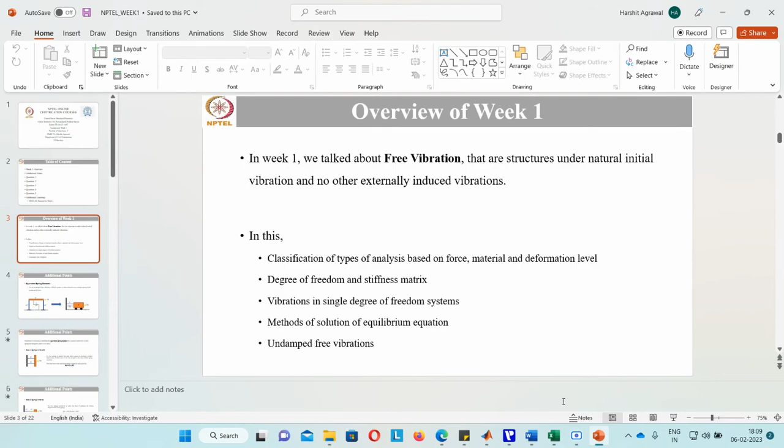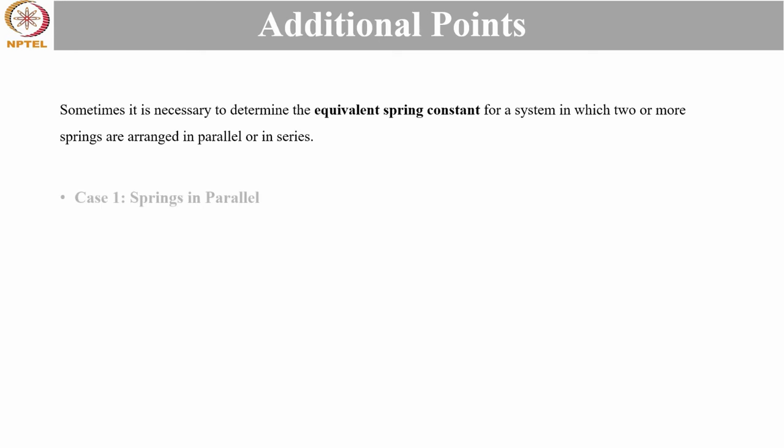Now, suppose these two columns have different material properties. Sometimes it becomes necessary to determine the equivalent spring constant where there are two or more springs arranged in parallel or series. And how can it happen? Suppose there are two columns which have different material properties or geometric properties, so they won't be able to offer the same stiffness, right? Thus, we need to know how to calculate equivalent stiffness, and such systems come under case 1, springs in parallel.

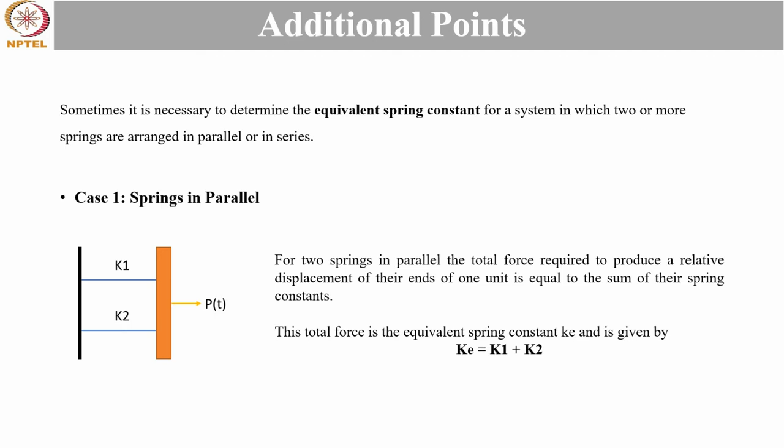So, if the two columns have different properties, the spring block system for the frame system will appear like this. And in this case, for the two springs in parallel, the total force required to produce the relative displacement at their ends of one unit is equal to the sum of spring constants. So here the total equivalent spring constant becomes Ke = K1 + K2.

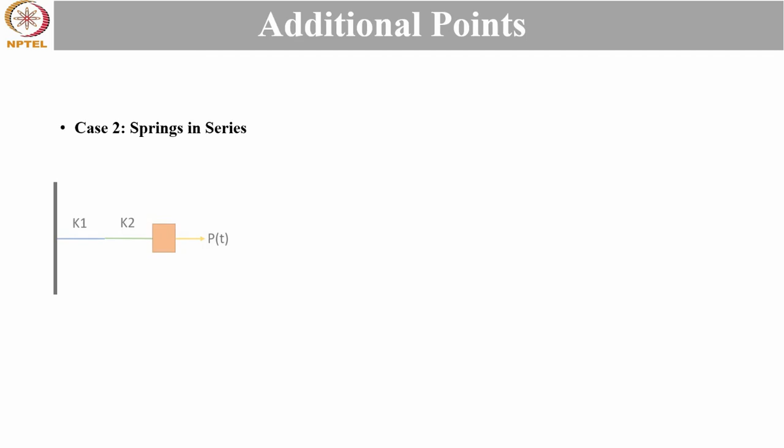Now suppose we have a multi-story building, a multi-story frame. So we may have more than one column on either side of the frame. So this is case 2, where springs are in series. And in this case, the spring block system may appear to be like this. For the springs assembled in series, the force produces a total relative displacement of delta U1 and delta U2. And the equivalent spring constant is given by 1/Ke = 1/K1 + 1/K2. So this was one additional point that I wanted to cover for week one.

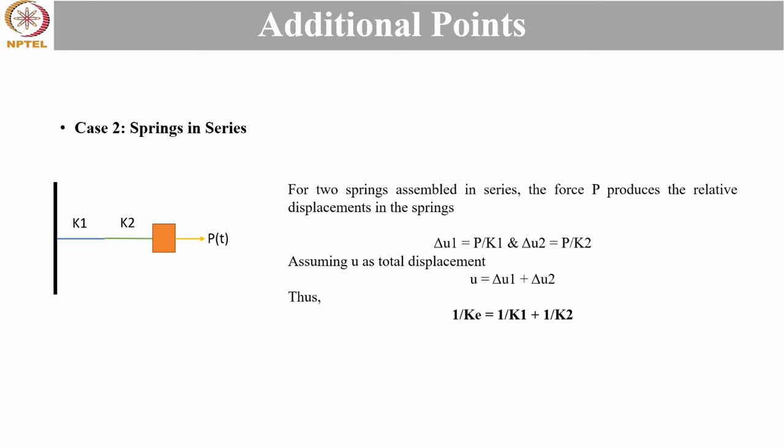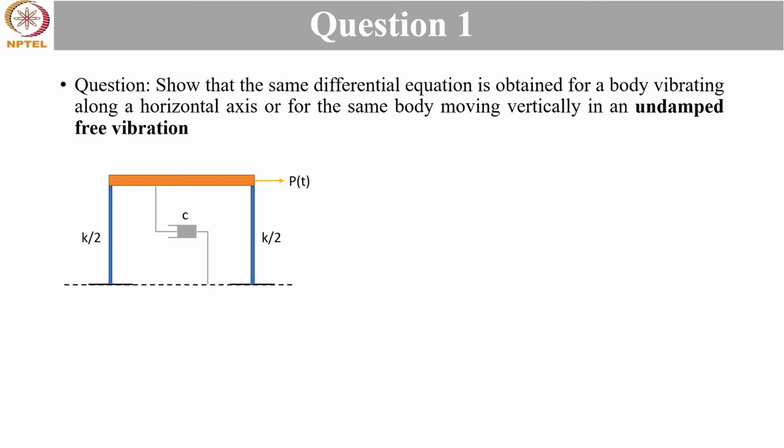So, first question. Show that the same differential equation is obtained for a body vibrating along a horizontal axis or for the same body moving vertically in an undamped free vibration. During the course content we saw that a frame structure can be represented as an equivalent horizontal spring block system. An undamped free vibration means that there is no external force, so P(t) = 0, and since it is undamped, C = 0. The dynamic equilibrium equation is m u double dot + K u = 0.

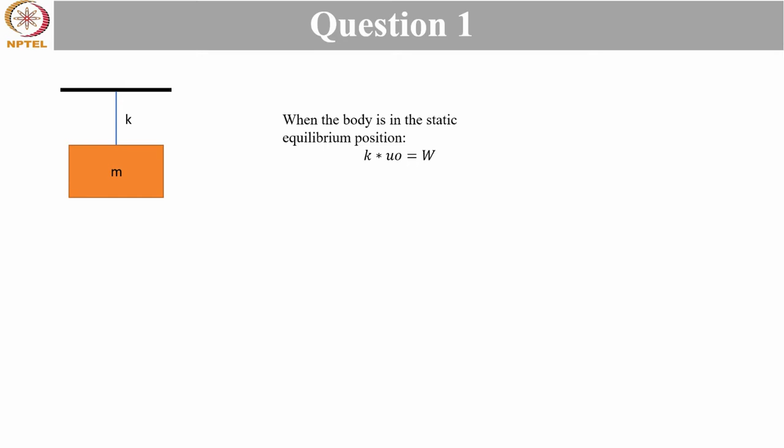Now, will this equation hold true if my body is vibrating in the vertical direction also? Here the spring block system represents a horizontal vibration of the frame. But will it hold true if the spring block system is vertical? That we will see. When the body is in static equilibrium, there will initially be a little displacement in the spring, balanced by the weight of the mass. So K u naught is equal to the weight of the block. Now suppose the body is displaced by a distance U from its position of equilibrium.

So what will happen? First, there will be a spring force acting upward, with value K times (u naught, the initial displacement at the equilibrium position, plus U, the displacement we have provided to the system). Second will be the weight of the block, acting downward. And third is the inertia force, m u double dot, acting upward. Why is the inertia force acting upward? It is due to D'Alembert's principle, that a moving mass always generates an inertia force opposite to the motion.

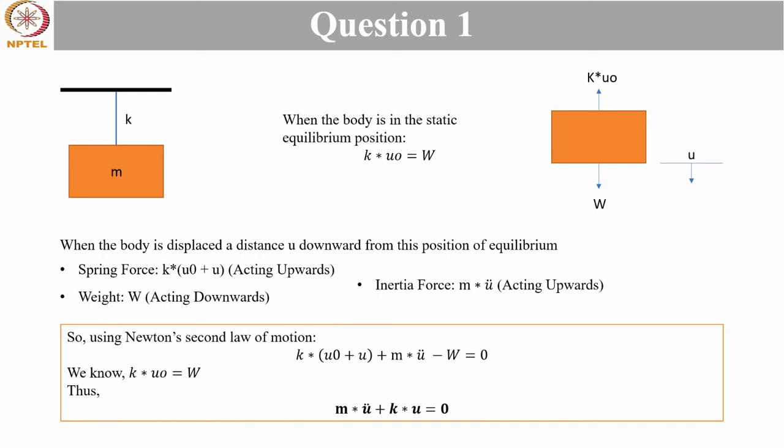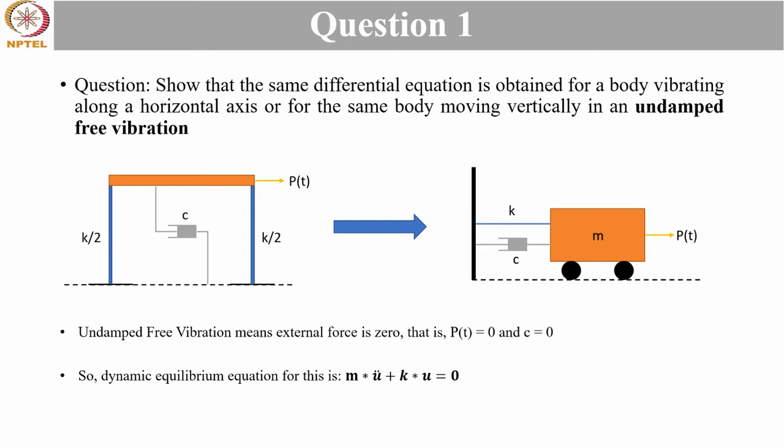So, using Newton's second law of motion, K(u naught + u) + m u double dot - W = 0. And from the initial static equilibrium relation, we know K u naught = W. Substituting this in the above equation, we get m u double dot + K u = 0. So this proves that the same differential equation is obtained whether we convert our frame structure into a horizontally vibrating system or a vertically vibrating system. This was just a proof question that I found needed to be included. Next we will see the numerical questions.

I hope everything is clear till now. Okay, so let's proceed ahead. Thank you, Mayur. Let's proceed ahead.

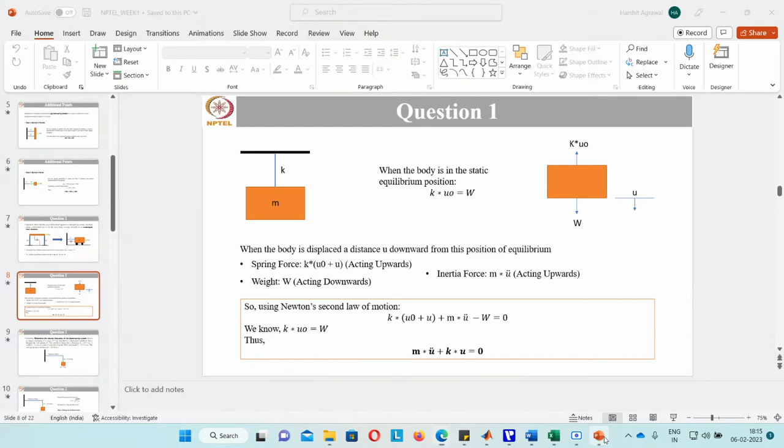So, second question. In this question, it is given: determine the natural frequency of a beam spring system shown in the figure, consisting of a mass of 5 kg attached to a horizontal cantilever beam through the coil spring K2. The cantilever beam has a thickness h equal to 0.5 mm, a width b equal to 1 mm, and is made of concrete of grade M20 and length L equal to 12.5 mm. The coil spring has the stiffness K2 equal to 20.

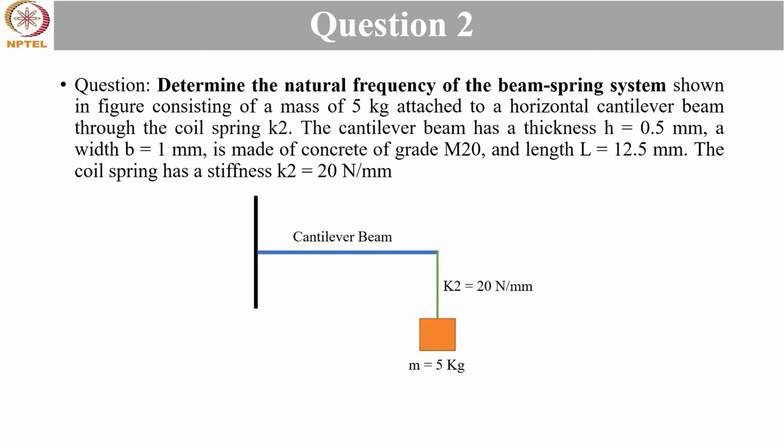So in the figure you can see we have a fixed support and a cantilever beam. The properties of the cantilever beam are given in the question: thickness 0.5 mm, width 1 mm, grade of concrete 20, and the length of the beam is 12.5 mm. There is a coil spring of stiffness coefficient 20, and at the end of the coil spring there is a mass block of 5 kg attached. So we need to determine the natural frequency of this spring block system.

Okay, so natural frequency of a system is denoted by omega n, and it is equal to under root of k equivalent upon mass. Now we know mass is equal to 5 kg, but what is k equivalent? K equivalent is not just k2, it is the equivalent of both cantilever beam and the spring. So we need to calculate the k equivalent in this case. And the theory for this we covered just a while ago, where we talked about springs in series and springs in parallel.

So step one is finding the K for the cantilever beam, because for the cantilever beam we have been given the data of its dimensions and its grade of concrete, and not the stiffness coefficient. So we will first find the stiffness coefficient for the cantilever beam. For a cantilever beam acted upon by a static load at the end, the stiffness coefficient is given by 3EI by L cube. Now we know L, but we don't know E and I. So first we need to estimate E, the elastic coefficient, and I, the moment of inertia.

When the grade of concrete is given, according to IS 456 the modulus of elasticity is 5000 under root FCK, and FCK is given as 20. So the modulus of elasticity will come out to be 22361 Newton per mm square. Second is the moment of inertia, BD cube by 12. The width is 1 mm and the depth is 0.5 mm. So 1 into 0.5 cube upon 12 will come out to be 0.01042 millimeter to the power 4.

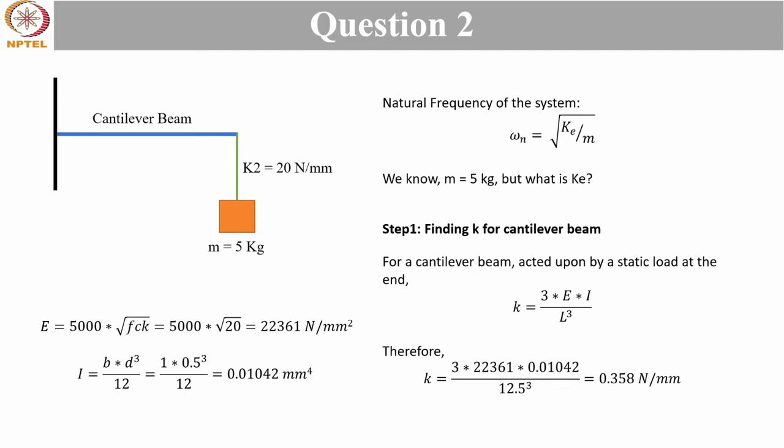So now we know the modulus of elasticity and the moment of inertia. So we can calculate K as 3EI by L cube. It will be 3 into 22361 into 0.01042 upon 12.5 cube, which will come out to be 0.358 Newton per mm. So this is the stiffness coefficient for the cantilever beam.

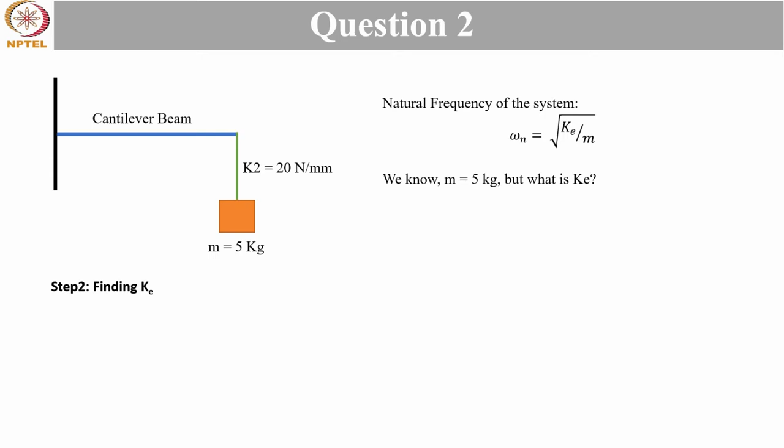Now we know the formula of natural frequency of the system. Second step is to find the K equivalent. We know the stiffness coefficient of the cantilever beam and of the spring. Since these two springs are in series, the K equivalent will be 1 upon K equals 1 upon K1 plus 1 upon K2. This formula we saw just some time back. Substituting both values, we will get the equivalent coefficient as 0.3517 Newton per mm, or 351.7 Newton per meter.

So we know the K equivalent now and we know the mass. The final step, step 3, is to find the natural frequency: omega n is equal to under root of K equivalent upon mass. K equivalent is 351.7 Newton per meter upon mass of 5 kg. Make sure that the units are proper. When we have a mass in kg, our K equivalent should be in Newton per meter. Doing the calculation, you will get the natural frequency of the system as 8.387 radian per second, which was intended from this question.

And this system included two springs in series. So we covered a new type of question where two springs of different properties were in series and in an undamped free vibration state. I hope you are clear with this question. Any doubts up till now?

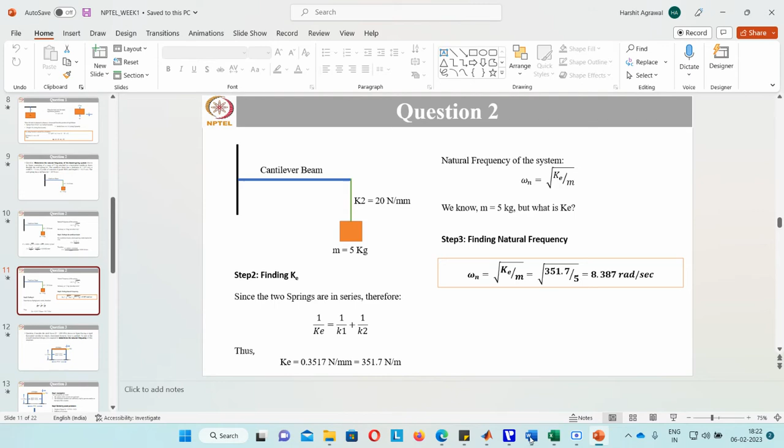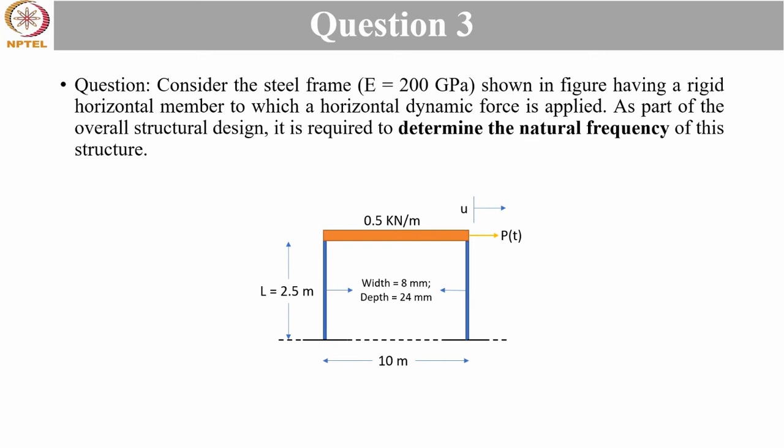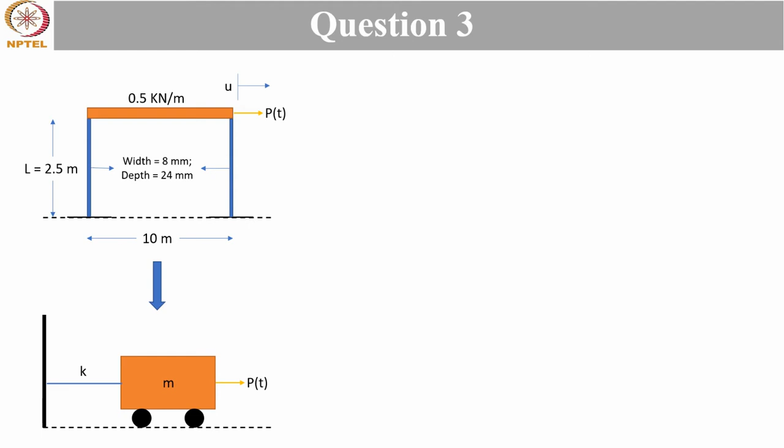Okay, so let's see how to solve this problem. We need to determine the natural frequency of this structure. So this is the structure. Now this structure can be converted into an equivalent spring block system as shown in the figure below, where K is the spring, M is the mass, and P(t) is the external force acting on the system.

Every time step one always remains the same, that is the assumptions that we need to make for converting this steel frame into a spring block system are as follows. First, the mass of the columns are neglected, and second, the horizontal members are sufficiently rigid to avoid any rotation at the top of the two columns. Whenever these two assumptions hold true, then only you can convert the steel frame into an equivalent spring block system. Else, there will be much more complications and you can't convert the system directly.

So, always start with these assumptions. See if these assumptions are given in the question, or assume them by yourself before proceeding ahead, if they say make necessary assumptions by yourself. Okay. So step two is first we need to estimate the system parameters. Now, what is the weight of the frame?

It is given 0.5 kilonewton per meter, but our frame is not of 1 meter, it is of 10 meter. So the total weight of the frame would be weight of the frame per unit length into total length. So it is 0.5 into 10, which is 5 kilonewton. So this is the weight of the frame, not the mass. Second is the stiffness of the columns. Now we have been given with the dimensions L, length, width, and depth.

So we first need to estimate the stiffness of the column. For stiffness we need moment of inertia and modulus of elasticity. Modulus of elasticity is given in the question, we saw 200 GPa, and moment of inertia we will estimate now. The formula for moment of inertia is bd cube by 12. So b is width, which is 8 mm, d is depth, which is 24 mm. So moment of inertia becomes 8 into 24 cube by 12, which is 9216 millimeter to the power 4,

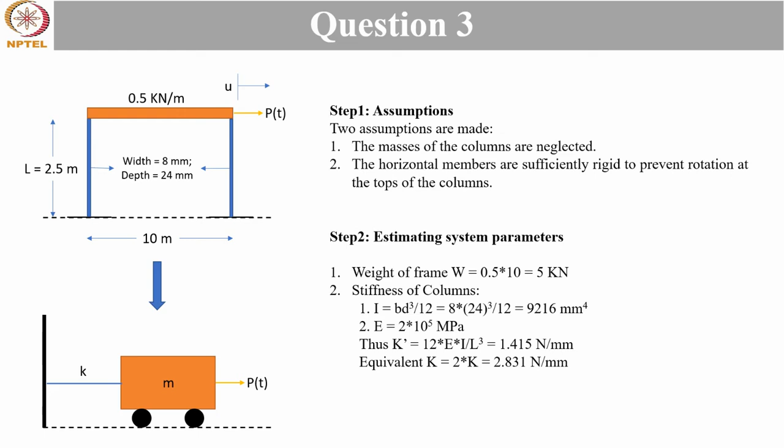So the natural frequency of the system can be calculated as omega is equal to under root of k by m. K we found as 2.831 Newton per mm, that we need to convert in Newton per meter first. So it will be 2831 Newton per meter. And mass is 5 kilonewton, we need to convert into kg, so it will become 500 kg.

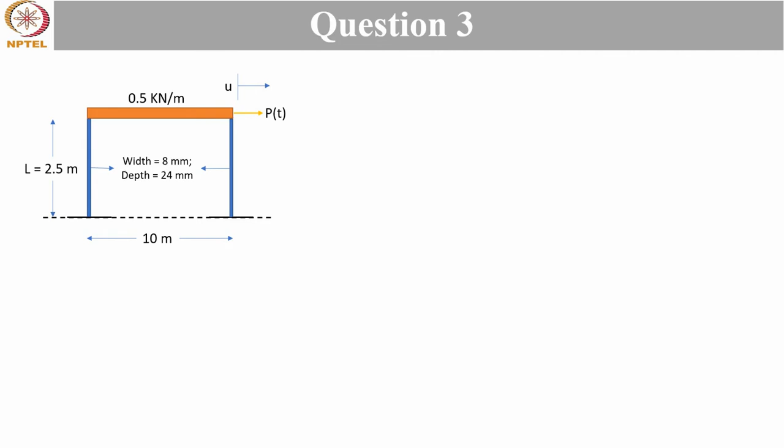So remember that always see the units first before reporting any answer, because unit conversion is a very important step when you are doing the calculations. So it will become under root of 2831 divided by 500, and upon doing the calculation you will get the value 2.38 radian per second. So this is the natural frequency of the system that was given in the question, 2.38 radian per second. So this solves our third question.

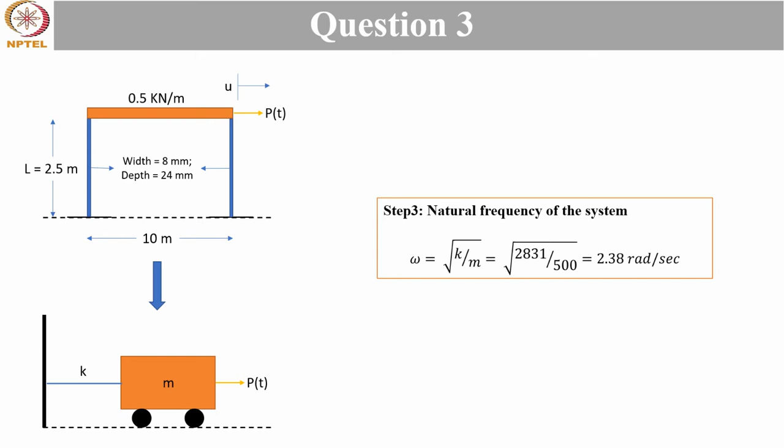Till now we have seen three questions. All three of them had some variation. First was a derivation, second we saw a question where two springs were in series, and third we saw a question in which two springs were in parallel. Now the fourth question. I hope things are clear till now.

Okay, so let's proceed ahead. So now we will see the fourth question, which is a practically linked question, which you can even visualize.

Okay, so the question says the elevated water tower tank with a capacity of 5,000 gallons of water, shown in figure, has a natural period in lateral vibration of 1 second when the tank is empty. When the tank is full of water, its period lengthens to 2.2 second. Determine the lateral stiffness K of the tower and the weight W of the tank. Tank means empty tank we are talking about. Neglect the mass of the supporting column.

So this was the assumption which we saw earlier also, which helps us to convert it into a spring block system. Assume 1 gallon of water weighs approximately 5 kg. So I will give you 1 minute to reread the question and think what has been given in the question and how we will proceed ahead.

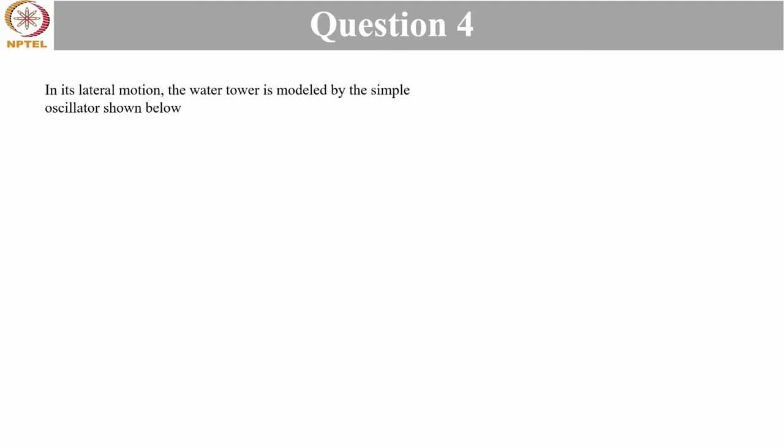So in its lateral motion, the water tower is modeled by the simple oscillator shown below. Why we can model this? Because it is given that the weight of supporting column can be neglected, and since it fulfills the assumptions of converting into a spring block system, we can convert it into a spring block system.

Now, we have been given two periods of vibration, one when the tank is empty and one when the tank is full. So, we first need to determine the natural frequency of vibration of tank. So, the natural frequency of tank when it is empty can be given as: when the tank is empty, the natural period is 1 second.

Now, we know omega is equal to 2 pi by T. Omega is equal to 2 pi times frequency, and frequency is 1 upon period. So omega is 2 pi upon time period. And we also know omega is equal to under root of k by m. So equating both the equations, we can say 2 pi by T is equal to under root of k by m.

Now, when the tank is empty, the period of vibration is 1 second, and when the tank is empty, the weight of the tank we can write as mt. So 2 pi by 1 is equal to under root of k by mt. This is our first equation, which we got from the data given in the question, the natural period when the tank is empty.

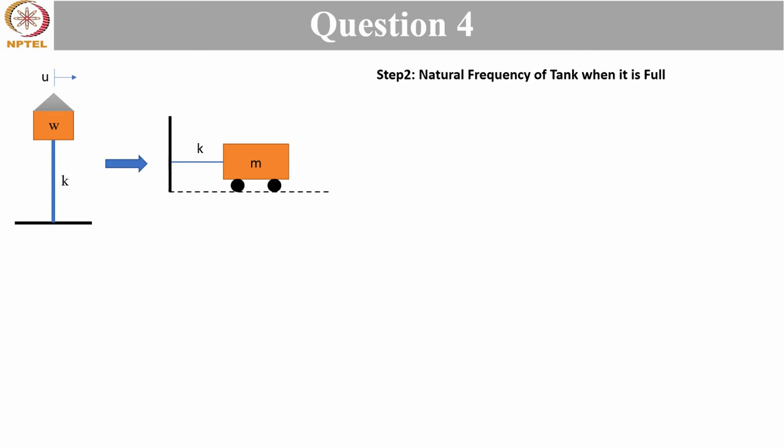Now, second, the natural period of the tank when it is full. Full means when it is filled with water. So when the tank is full, the natural period increases to 2.2 seconds. So again, omega is equal to 2 pi by T, and omega is equal to under root of k by m. So equating both equations, we get 2 pi by T is equal to under root of k by m. T is 2.2 seconds, and m this time would be mt plus mw. Mw is the weight of water. So 2 pi by 2.2 is equal to under root of k upon mt plus mw.

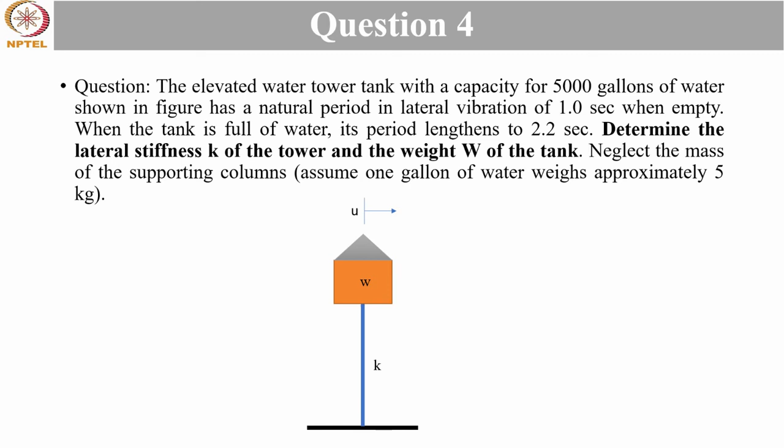Now mt we don't know, k we don't know, mw we know. It was given in the question that the water capacity of the tank is 5,000 gallons of water, and we are assuming that the tank is completely filled with water when they talk about the tank being full. And it has been said to assume that 1 gallon of water weighs 5 kg. So 5,000 gallons of water will weigh 5,000 into 5, that is 25,000 kg.

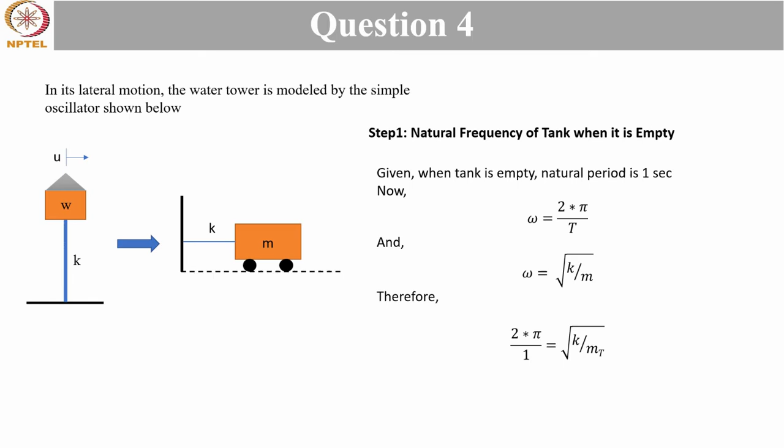Now we have two equations. One is 2 pi by 2.2 equals under root of k by mt plus mw, and the one we saw in the first step, which was 2 pi by 1 is equal to under root of k by mt. So we will square both equations and divide the LHS and the RHS respectively. We'll get (2 pi by 1) squared upon (2 pi by 2.2) squared. So it will be 2.2 squared upon 1 squared. That will appear on the LHS side.

And on the RHS side, under root of k by mt squared will be k by mt, and under root of k by mt plus mw squared will be k upon mt plus mw. So k and k will cancel out, and we will get mt plus mw upon mt, and mw we know is 25,000. So the final equation will be 2.2 squared upon 1 squared is equal to mt plus 25,000 upon mt.

Now solving this equation, (2.2 squared minus 1 squared) mt is equal to 25,000, and thus the mass of the tank will come out to be 6510.4 kg. The calculations you can also do side by side. I have solved this question initially, so I know the values directly. So the mass of the tank is 6510.4 kg.

This was the first thing that we needed to estimate, but in the question we were asked the weight of the tank. Mass of the tank is different, weight of the tank is different. So you just need to read the question very carefully before reporting the final answer. So weight is mass into acceleration due to gravity, so mt times g. G is 9.8 meter per second squared.

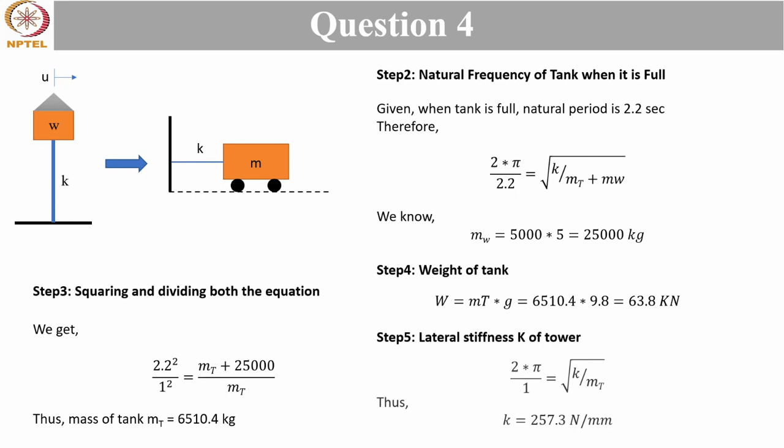And now we need to also calculate the lateral stiffness K of the tower. So we know the mass of the tank, and we know the mass of water. So we can use either equation, the natural frequency of the tank when it is empty or when it is full. Suppose we are using the first equation when the tank is empty, so we have 2 pi by 1 is equal to under root of K by mt.

We know the value of mt, so just substitute the value of mt and do the calculation. Squaring both sides, we will get K is equal to 257.3 Newton per mm. So this way we estimated both the weight of the tank and the lateral stiffness K of the tower.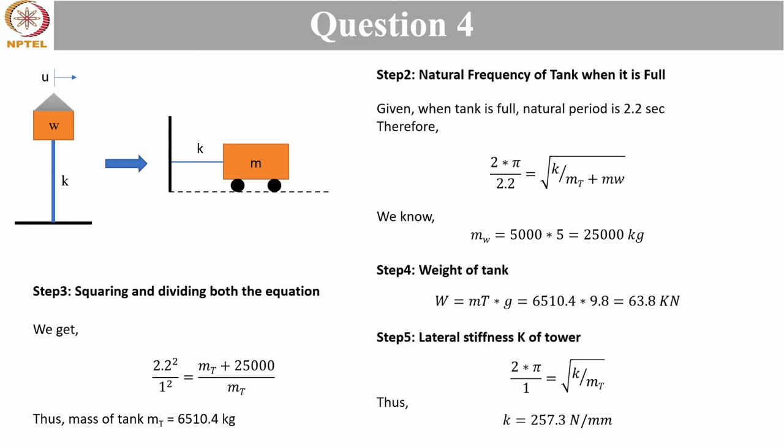I hope this question is clear to everyone. Any doubts in this question?

Arshad, do you have any doubts?

Okay, so let's proceed ahead to the fifth question. What this question says: the steel frame shown in figure is fixed at the base and has a rigid top W of weight 100 kilonewton. Experimentally, it has been found that its natural period in lateral vibration is equal to 1/10 of a second. It is required to shorten or lengthen its period by 20%, either by adding weight or strengthening the column.

We need to determine the needed additional weight or additional stiffness for each case, for shortening or for lengthening. Neglect the weight of the column. You can see the diagram. There is a simple steel frame structure, two columns supporting a steel frame. The weight of the steel frame is given, and the natural period of vibration of the steel frame is also given.

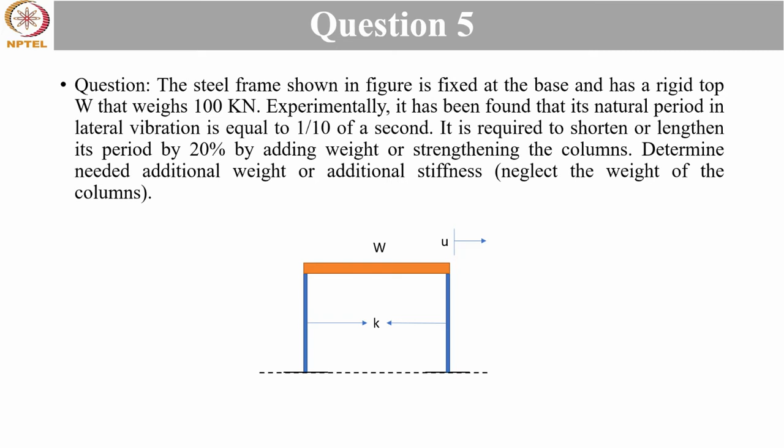So let's see the solution now. I hope you are clear with the question. So this is our frame column system. First, we need to determine the stiffness of the column. In the question, the weight of the steel frame has been given. Initially the natural period of vibration is also given, but before proceeding ahead with how we can shorten or lengthen the period, we need to first determine the stiffness of the column.

So we know the period of vibration and weight of the steel frame. So omega is equal to 2 pi by T, and omega is also equal to under root of k by m. So 2 pi by T is equal to under root of k by m. T is 1/10 of a second, which means 0.1 second. The weight is given as 100 kilonewton, but m is mass, so we need mass. mg is equal to W, so m is equal to W by g. So 100 divided by 9.8, that will be our mass.

So 2 pi by 0.1 is equal to under root of k into 9.8 upon 100. Solving this equation, we will get k is equal to 40.243 Newton per mm. So this is the stiffness of the columns, both the columns combined. Okay.

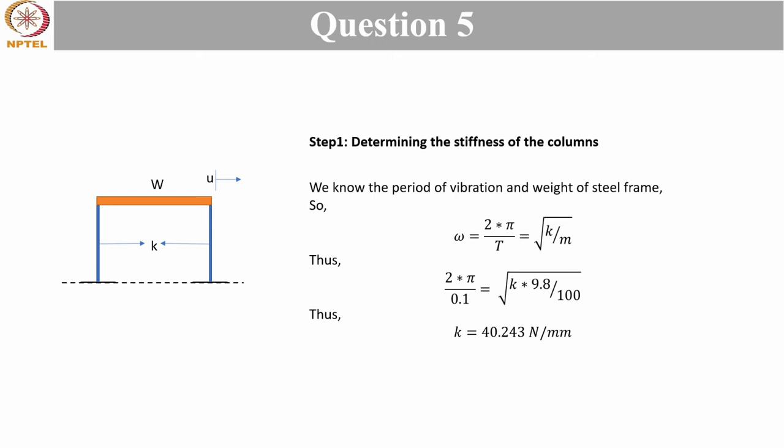Now, the first part of what we need to solve: we need to shorten the period of vibration by 20%. There are two options for us. Either we can focus on the frame or on the columns. For shortening the period, either we can reduce the weight of the frame or we can strengthen the column, but we can't reduce the weight of the frame. So the only possible option is to strengthen the column, which means we need to increase the stiffness of the column.

So the new period, a 20% decrease, means 0.8 times the original period. So 0.8 times 0.1, which is 0.08 second. Therefore, again, omega is equal to 2 pi by T, and omega is equal to under root of k by m. Suppose we need to increase the stiffness of the column by delta k. So 2 pi upon 0.08 is equal to under root of k plus delta k times 9.8 divided by 100. Why 9.8 divided by 100? To convert weight into mass.

And 40.243 Newton per mm was our actual stiffness of the column, which we converted into Newton per meter, and delta k is the additional stiffness that we need to provide to strengthen the column, which will help us shorten the period by 20%. Solving this equation, we get delta k is equal to 22.637 Newton per mm. By this amount, we need to strengthen the column. So this is the first part of our solution.

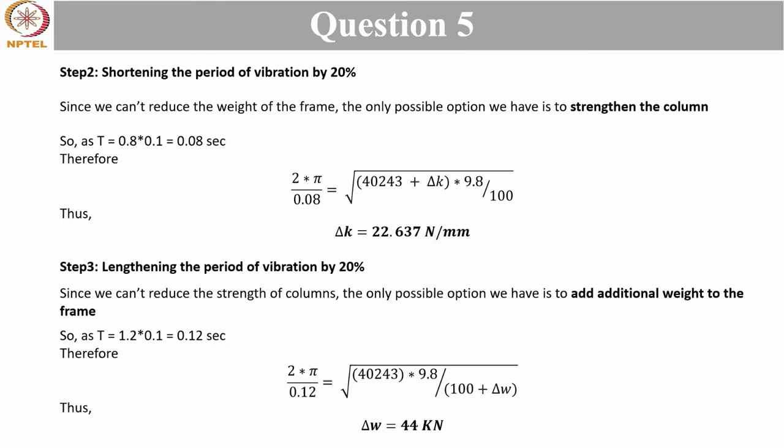So in this way, we have covered different kinds of practically related additional questions that will help you to solve the NPTEL assignment and will provide you much better insight into the content that was covered in week 1 of this course. Now I will teach you one additional thing, that is how to code everything that you saw, how to see everything visually through a MATLAB code.

So as a part of additional learning in every live session of mine, that is every Monday from 6 to 8, I will cover a tutorial of MATLAB wherein I will describe a system that was covered in the week content. So for week one, we will see displacement and velocity response of an undamped free vibration single degree of freedom system. With time, we will see other systems also.

So you will get much more clarity of how these displacement and velocity responses change with change in the vibrating system, and it will provide you a new way to learn the same thing. So let's see now. Our objective is to visualize the motion in terms of displacement and velocity of a simple undamped oscillatory structure with a single degree of freedom.

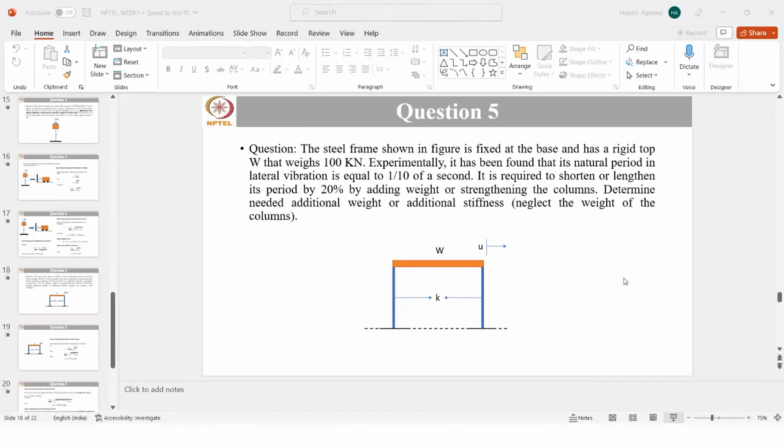I guess someone raised a doubt. Okay, so there was nothing. Now,

so we have seen the initial conditions given, and now I will be opening the MATLAB software on my laptop so you can see how to code. If you have MATLAB installed on your laptop, I am giving you 2 minutes to open the MATLAB file, and you can try to code with me, or you can write the code on a pen and paper and implement the same later on. And if you have any doubt, you can ask me in the next live session, or drop your doubts in the NPTEL forum also.

So we will go step by step. We will define every property properly and clearly. All the syntax that I will be using today is very simple and basic. So you don't need to worry if you don't have any prior experience coding in MATLAB. But during these live session tutorials, you will learn a lot about MATLAB and how it can be used for coding a structural dynamics problem.

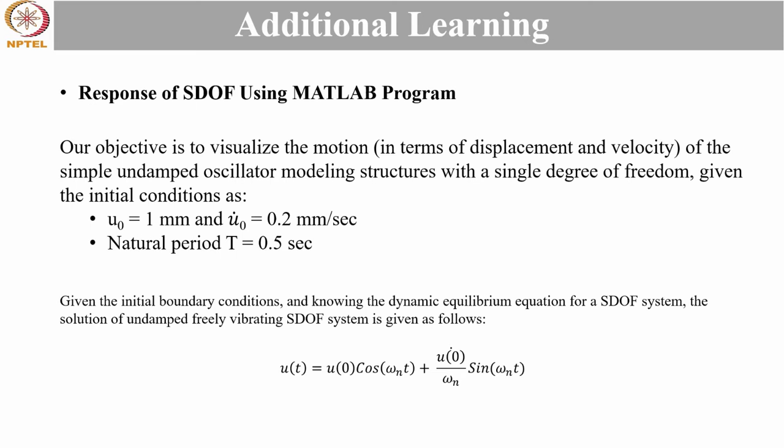So I'm giving you 2 minutes if you want to open your MATLAB, else I will start. So just open a blank command window. We'll wait for 2 minutes and then we will start.

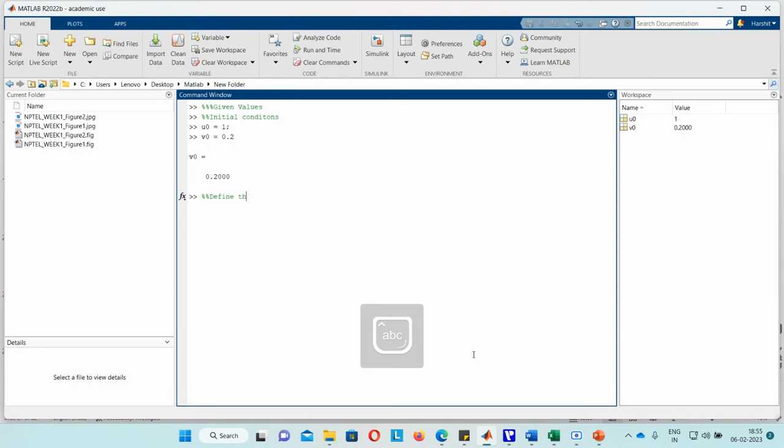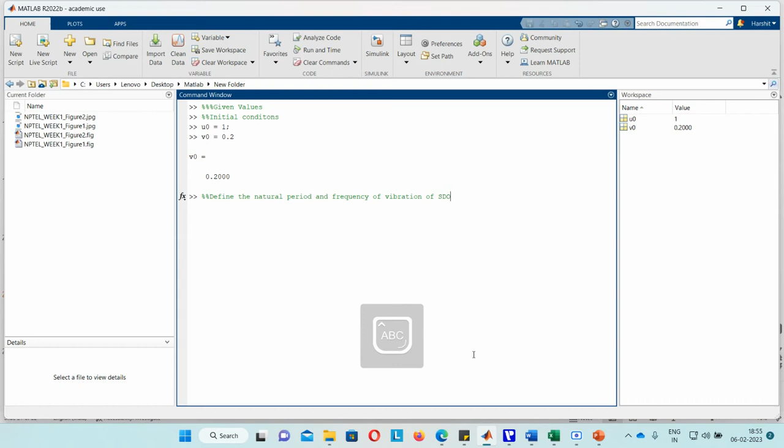Okay. On the right side in the workspace, you can see any parameter that you will define will appear in the workspace. So you can cross verify the parameter value. Now we will define the natural period and the frequency of vibration. Define the natural period and frequency of vibration of single degree of freedom system.

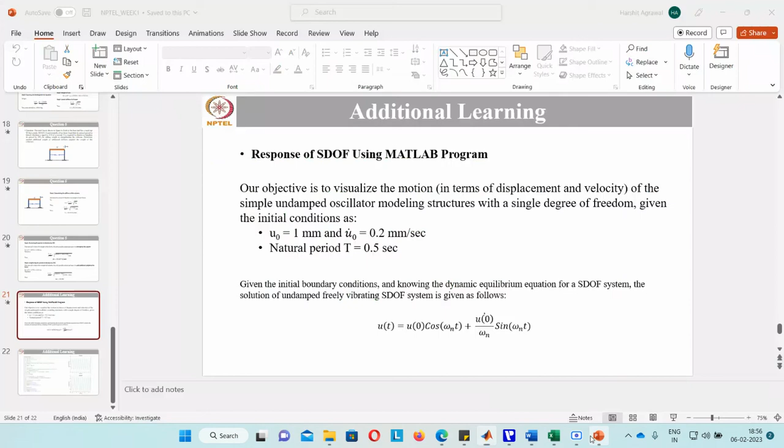Okay. So T is given as 0.5. I will just cross check. T is given as 0.5 second. So if T is equal to 0.5, omega will be 2 pi by T. So omega is equal to 2 times pi. Pi is equal to 22 by 7. MATLAB knows it, it takes this directly in terms of pi, and it will give us the value of it.

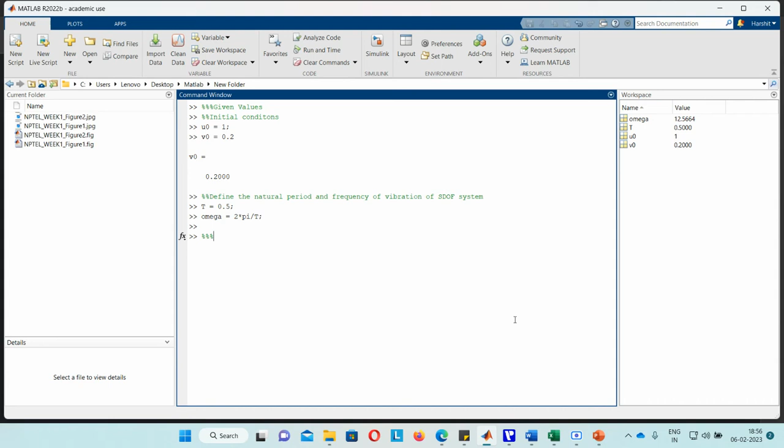So omega is equal to 2 pi by T, and you can see on the workspace our omega value is also defined. You can also check it through calculator and you will obtain the same value. Okay, so now we have defined all the given initial values. So the next step is estimation, or we can say problem solving.

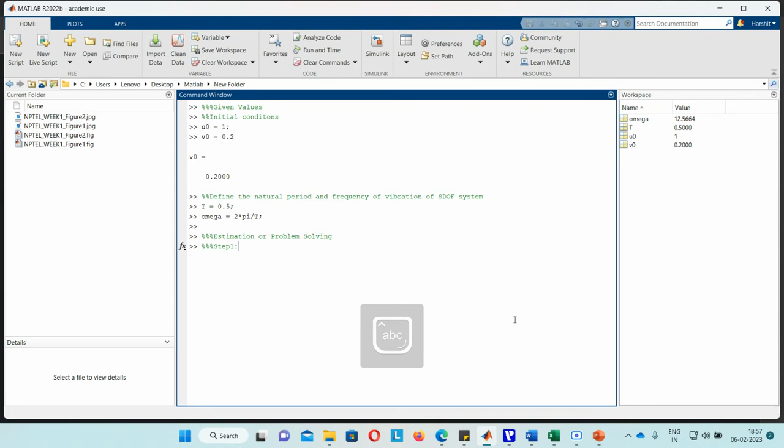Okay, so in this, step one is, we need to obtain the displacement versus time and velocity versus time. So how much time? Suppose we take time period of 5 seconds. Okay, you can take 10 also, 15 also, anything. I'm assuming a time period of 5 seconds. So we need to generate a time span between 0 to 5 seconds so that we can have different values between this time, and we can see a plot of displacement versus velocity.

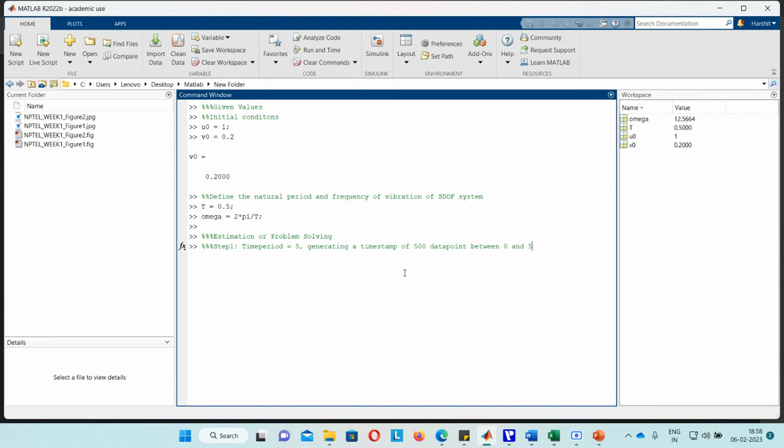So suppose I am generating a timestamp of 500 data points. So timestamp is how much data points we want between 0 to 5 second. 5 second is a time of observation. So I want 500 data points between 0 and 5. 5 should have been defined in the question, but I mistakenly forgot about defining the time in which I want to see the displacement versus time and velocity. So I am defining right now the time is 5 seconds.

So how to generate this data point timestamp? It is generated like this. T is equal to linspace. 0 is the initial value, 5 is the final value, and how many points we need between 0 to 5? 500 points. So what linspace does, it will divide 0 to 5 in 500 equal intervals. So if you want to divide 0 to 5 in 5 equal intervals, it will be 0, 1, 2, 3, 4, 5. Now we are dividing in 500 equal intervals, so it will be 0, 0.01, 0.02, like this.

It will generate a matrix of 500 data points. So this is how we define the timestamp. So you can see here it is a matrix of 1 into 500 points. Now step 2 is to calculate the displacement response.

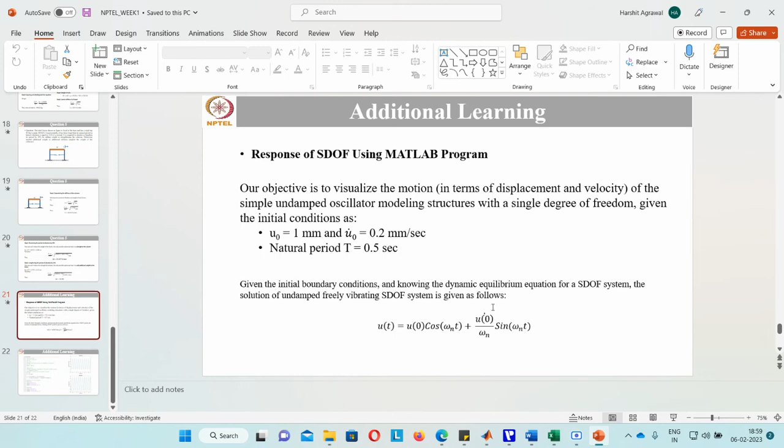So we have seen the solution of undamped free vibrating single degree of freedom system, which is A cos omega n t plus B sin omega n t. A and B are constants whose value we derived as A is equal to displacement at time t equal to 0 and B is velocity at time t equal to 0 upon omega n. So first we'll define these both constants.

A is u naught and B is v naught upon omega. Okay, I mistakenly wrote VO. It is V naught upon omega.

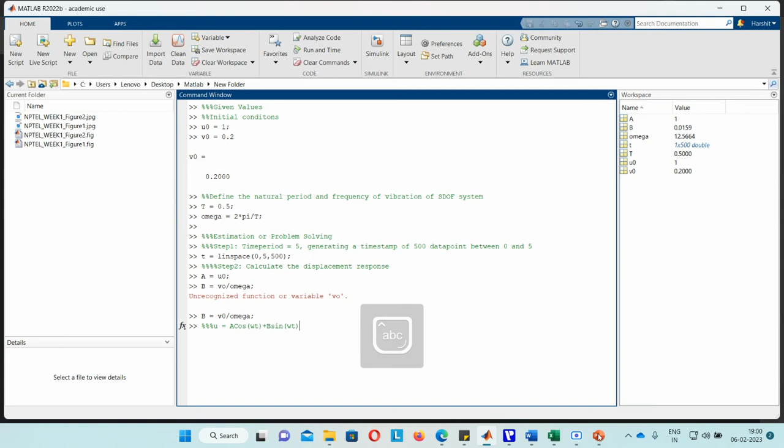So both A and B are defined, and we know the solution of U is equal to A cos of omega t plus B sin omega t. So we know the value of A, B, we know omega, natural period and frequency, and we know the time.

So U will become A times cos of omega times t plus B times sine of omega times t. So this is the equation of displacement versus time for an undamped freely vibrating single degree of freedom system. Now, what is the equation of velocity versus time?

It is just a differential form of displacement versus time. So if we differentiate A cos omega t plus B sin omega t, it will become minus A omega sin omega t plus B omega cos omega t.

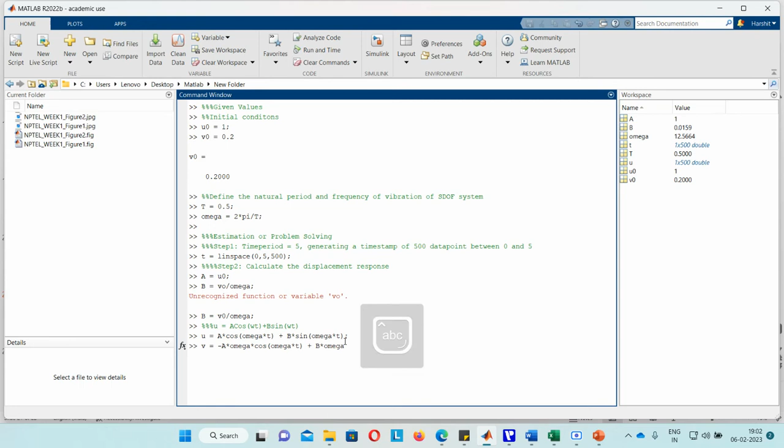So v is minus a times omega times sin omega t, sorry, a times omega sin omega t. Differentiation of cos is sin omega t, plus b times omega. Differentiation of sine is cos omega t. So this will be our velocity response.

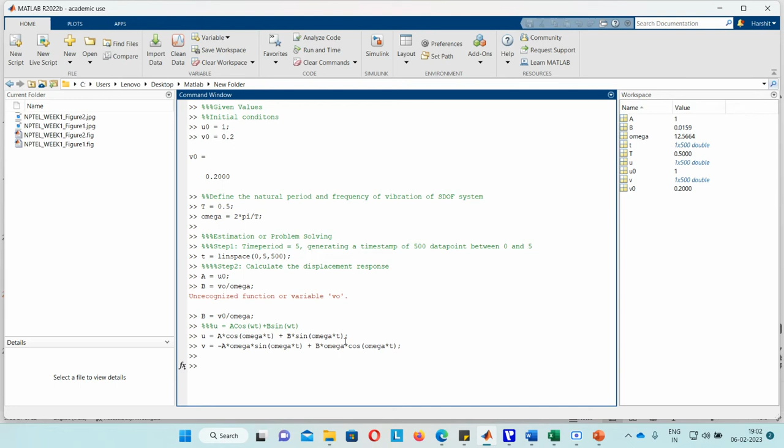So you can see on the right side in the workspace, both displacement and velocity response have been defined as a matrix because our time period is of 500 points. So displacement and velocity will also be of 500 points. Now the final step, step 3, is to plot the response, that is to visually see the response. So how is it done?

First we will plot displacement versus time. There is a command known as plot. So plot x comma y. x is the x-axis, which is the time, and y is the vertical axis, which is our displacement. So we will write plot t comma u, and we will give the title using the title command as response.

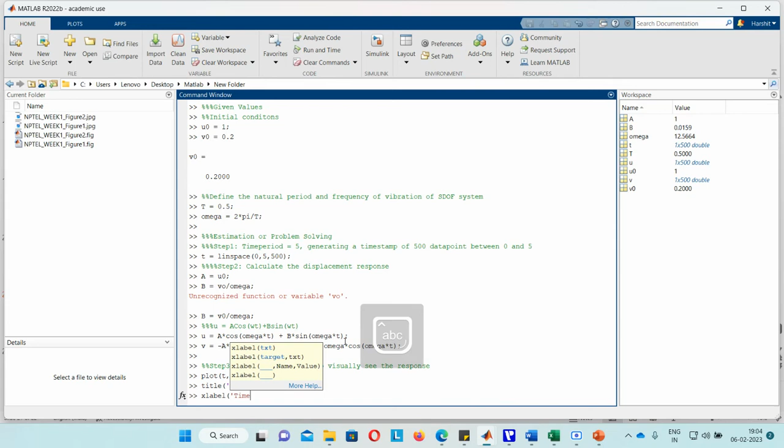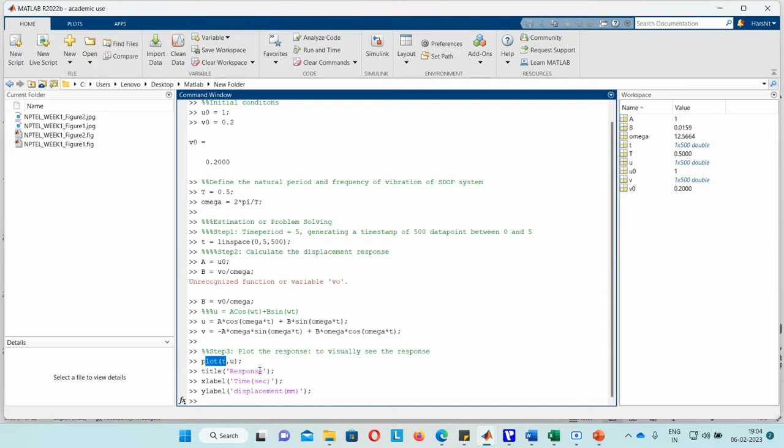We will label the x-axis with xlabel, which is time in seconds, and ylabel as displacement in mm, the values that were initially given in the question. So you can see, as soon as you write plot t comma u, MATLAB will generate a figure.

So this is displacement versus time for a freely vibrating undamped single degree of freedom system having initial conditions as well. You can see at time t equal to 0, there is an initial displacement of 1 mm. That was our initial condition. Okay, so this is the response of displacement versus time.

You can also save this figure in any format that you want if you want to visualize it later on. Like I have saved these figures initially also. So this is the response of displacement versus time. Similarly, we can see how the velocity versus time is varying. So again, plot t comma v.

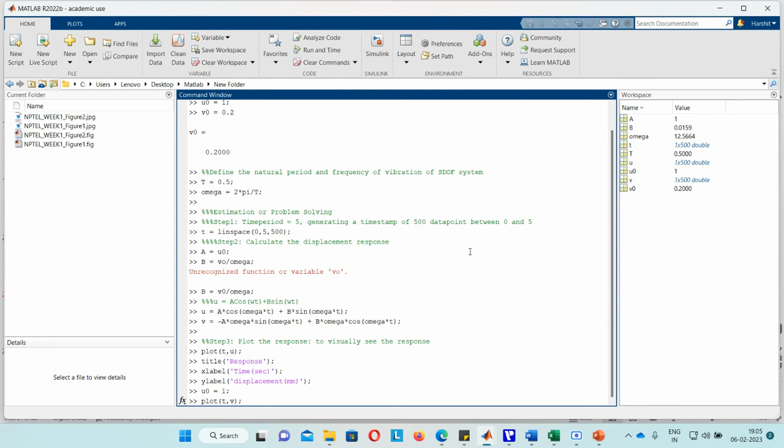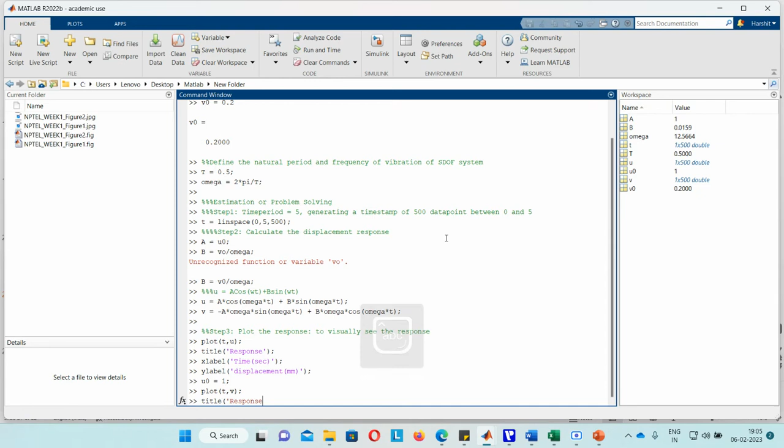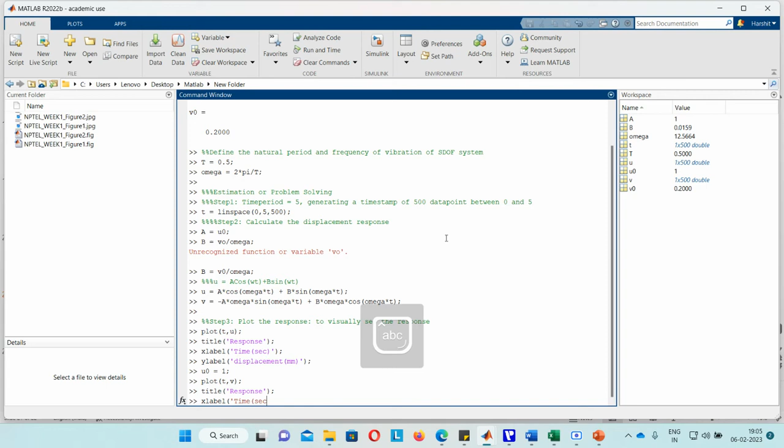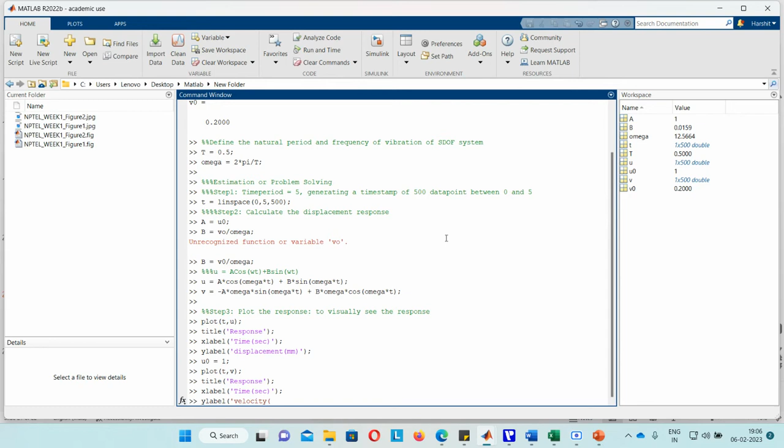So it will plot. Okay. First, we will apply the labels also. Title is response. xlabel will again be time in seconds. And ylabel this time will be velocity, velocity in millimeter per second. Okay. So I have defined the plot, title, xlabel and ylabel. So let's see the plot.

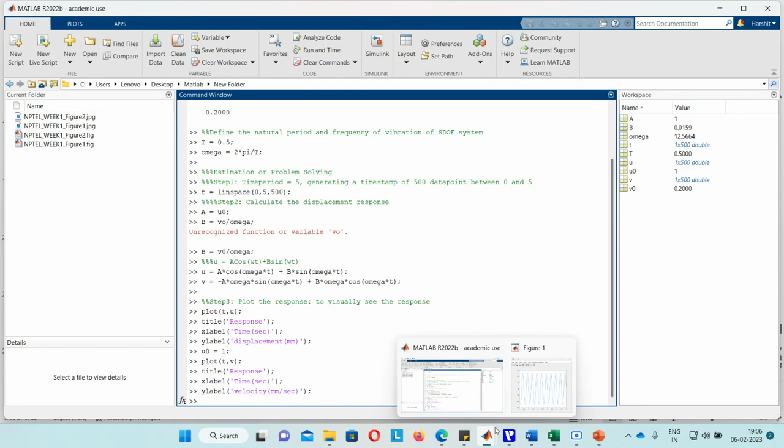So you can see the velocity versus time response for the initial condition and the period of vibration that we had. And you can see this is not zero. It is starting somewhere close to zero, which is 0.2. Initial velocity was 0.2. So it is starting from 0.2 and it is vibrating. The velocity of the frame is changing like this for a time scale of 5 seconds.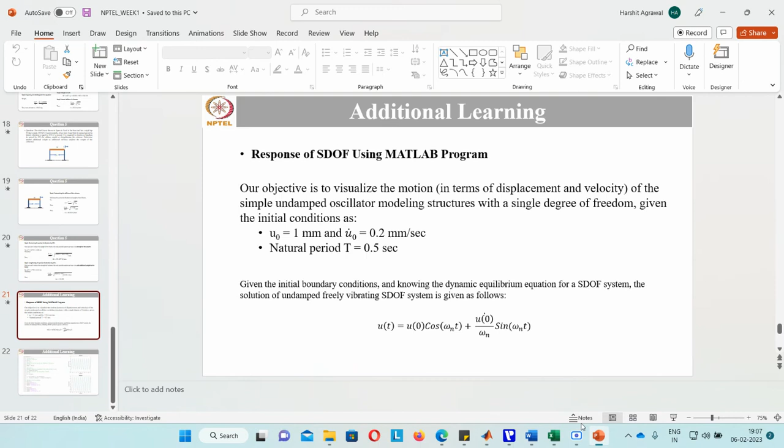If you want to increase the time scale, you can. You can see it for 10 seconds, 1 second, 2 seconds, anything. So this is how we visually see vibration in a single degree of freedom system in undamped freely vibrating motion. The same thing has been shown in the slide here: the commands, everything that we wrote, and the response.

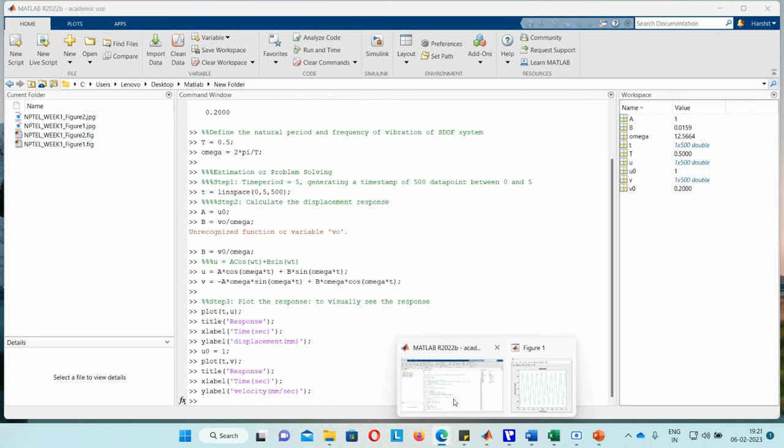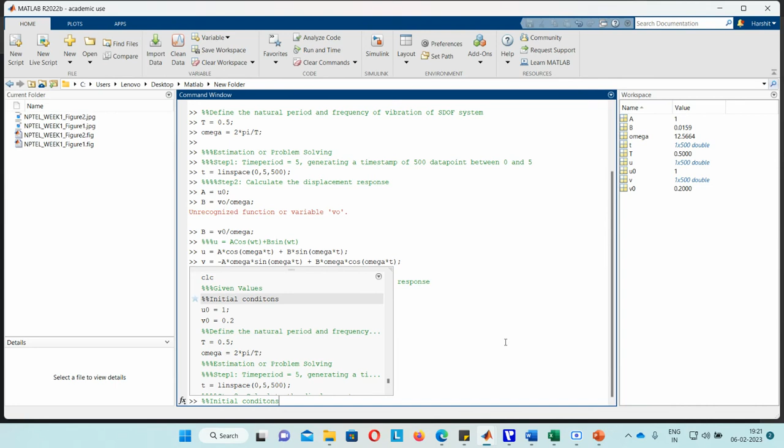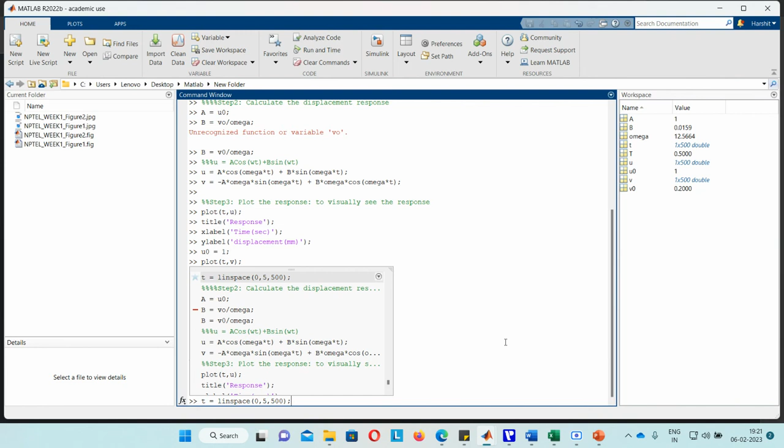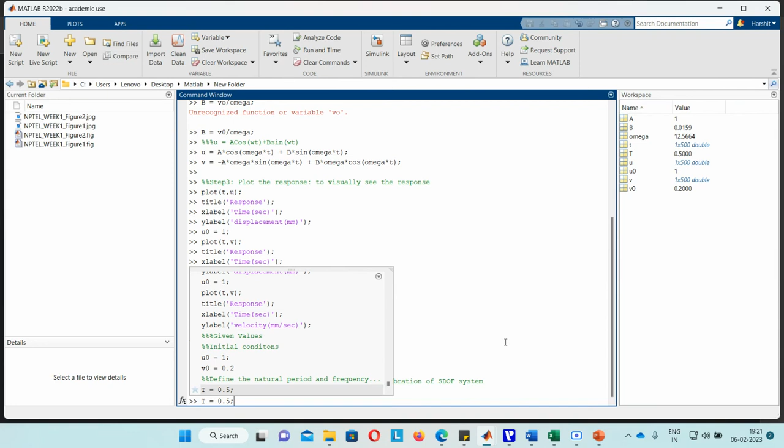So there was 0 to 5 seconds and you are taking 5000, and vectors must be of same length. Okay, let me try in front of you. First are the given values, initial conditions. So u naught is 1, v naught is 0.2. That error should not come, but still we will see. And we'll define natural period and frequency. T is 0.5, omega is 2 pi by T.

Sorry, I was on mute. So I am writing the code again. Let's see what the result will be, and where we are catching the error. I'm defining every step of the code one by one. I hope I am audible now. So I've defined till omega. Now estimation.

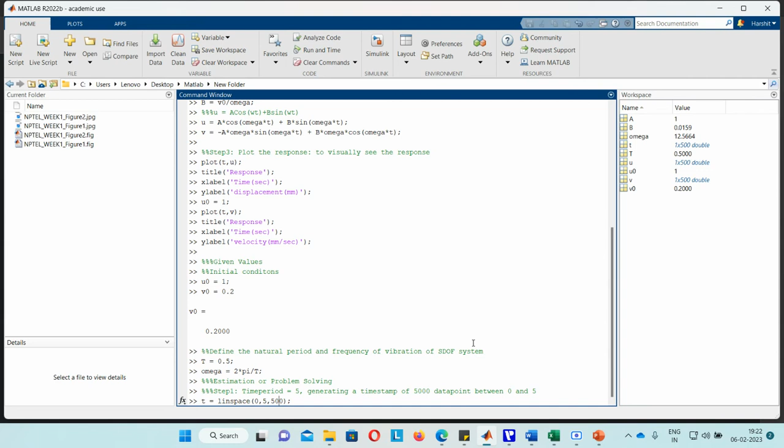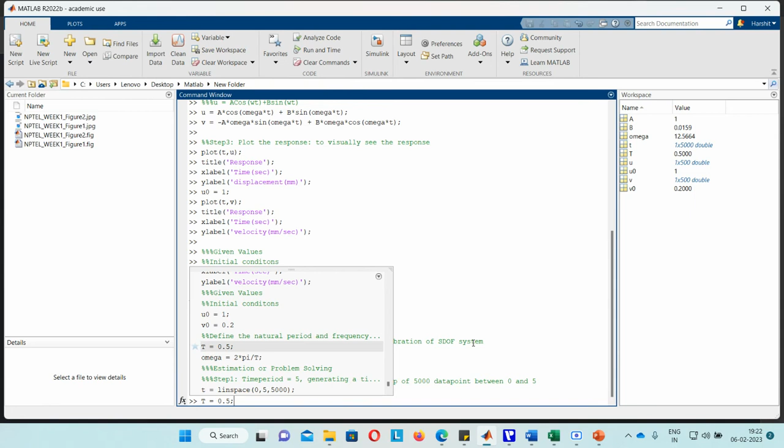So first is time period. Here you are defining 5000 data points, no? Let's see. So here it will come 5000. Now t is 5000. Maybe the error is coming because you again need to calculate u and v. When you are changing the t value, the range of t values, you need to again calculate omega and u and v. Let's see whether that was the error. I guess that was the error.

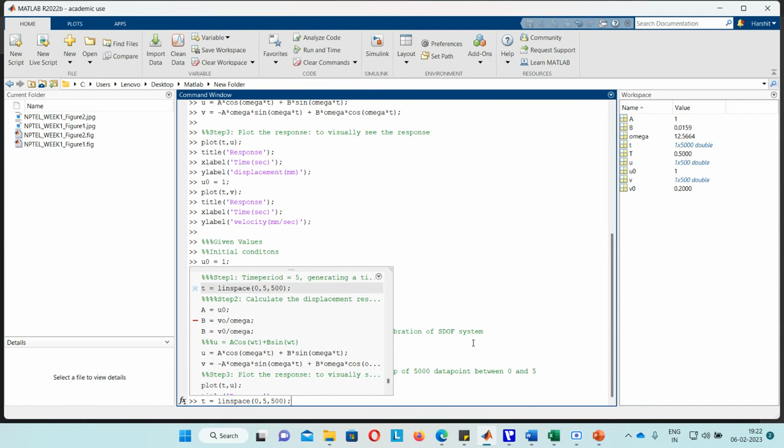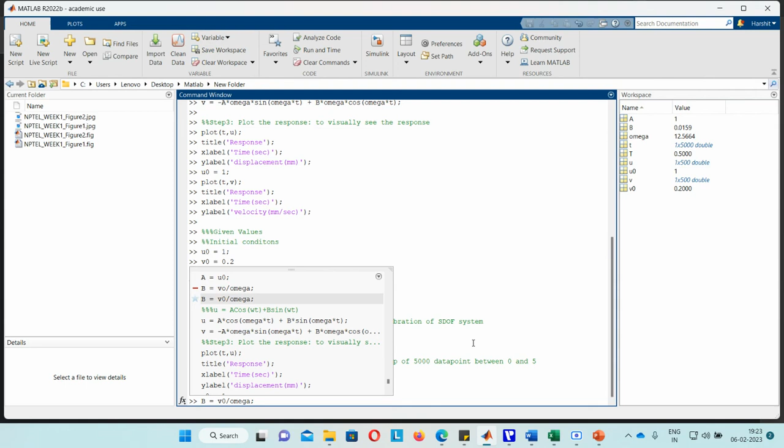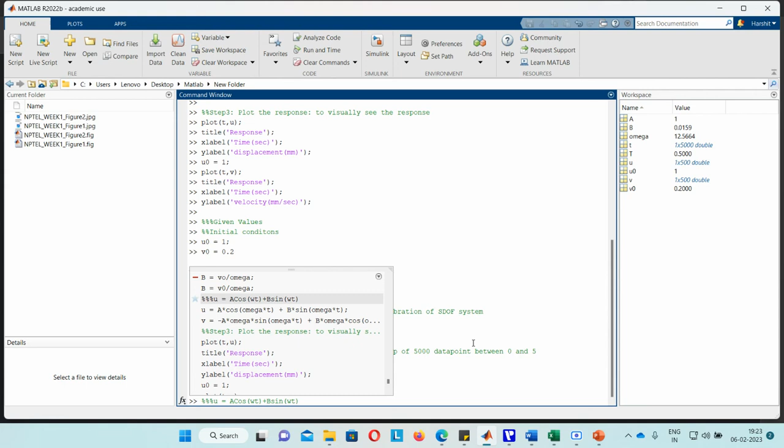So see, this is a quick way in which you can change some parameter and again define all the values. Just click on the new line and click on the up arrow. This dialog box opens up where you can easily see the old commands and define everything again. So we have defined a and b constants. Now we will define u as a function, displacement and velocity vector. Okay, and now we'll see the plot.

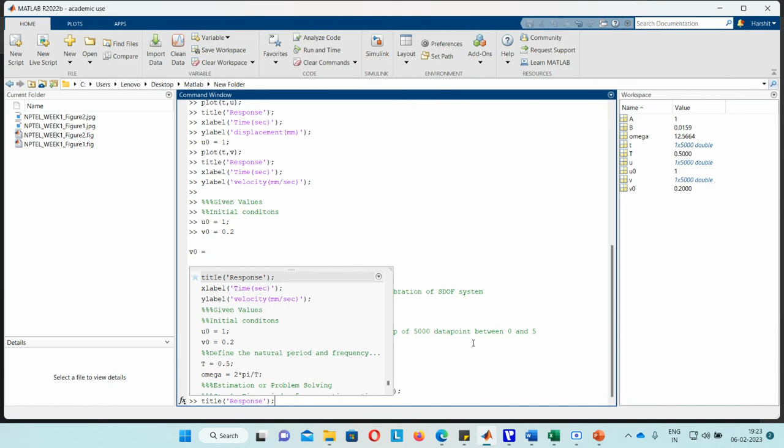Which plot were you checking? Plot of velocity versus time, no? So let me see that directly. Plot t versus v. See, it is coming out properly.

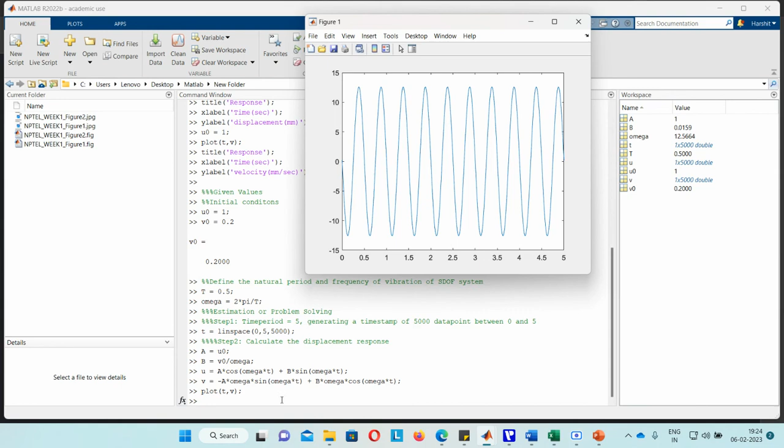When you are changing the time stamp to 5000 data points, you need to again calculate u and v, because u and v were for the initial time span, which was with 500 points. Now your x-axis has 5000 points and your y-axis has 500 points if you are not defining them again. That's why "vectors must be of same length" is the error that is coming. At the x-axis the vector is of length 5000, and if you don't define u and v again, the y-axis vector is of only 500 points. So that's why this error was coming.